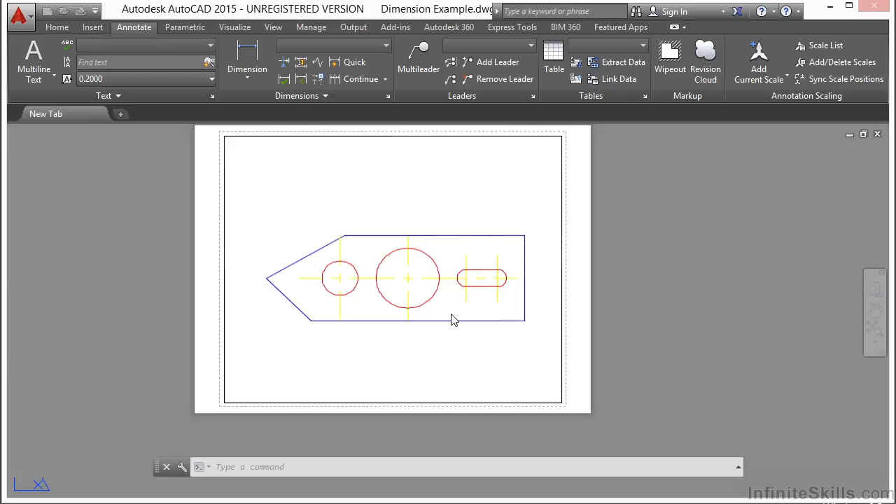Go to the Dimension tab. Here we have several different dimensions already put in. You can make changes to dimensions through the Properties panel, which you can open by pressing Control and the number 1 key at the same time.

If you want to change the text value, double-click the text, and that will open it up in a text editor. You'll have what looks like your multi-line text editor contextual ribbon, giving you access to justification, fonts, colors, bold, italics, etc. You can even match properties inside the text editor, change your text style, or type things in.

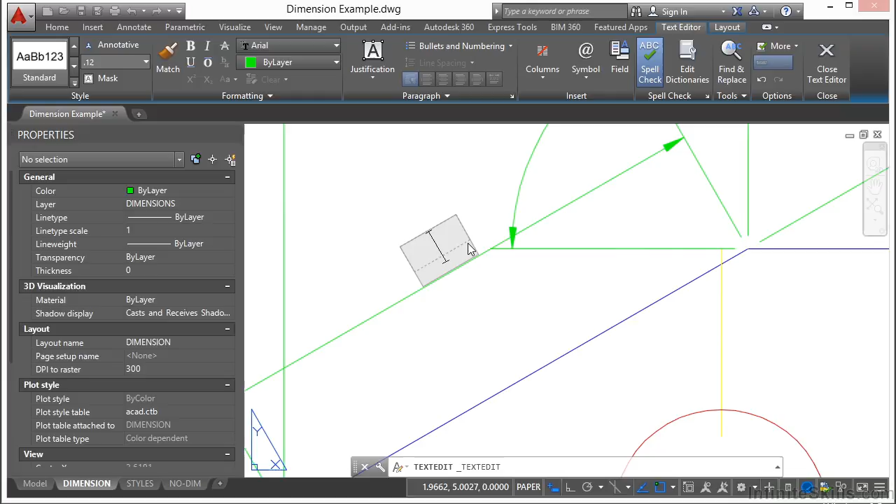Let's say we need to represent this not with the measurement, but with some actual words. Just select that text object and press delete or backspace to erase it, then type in anything else. I'm just going to type in something simple: side. If you press enter, it carriages down to another line, so click somewhere outside of that text, and there is your new text.

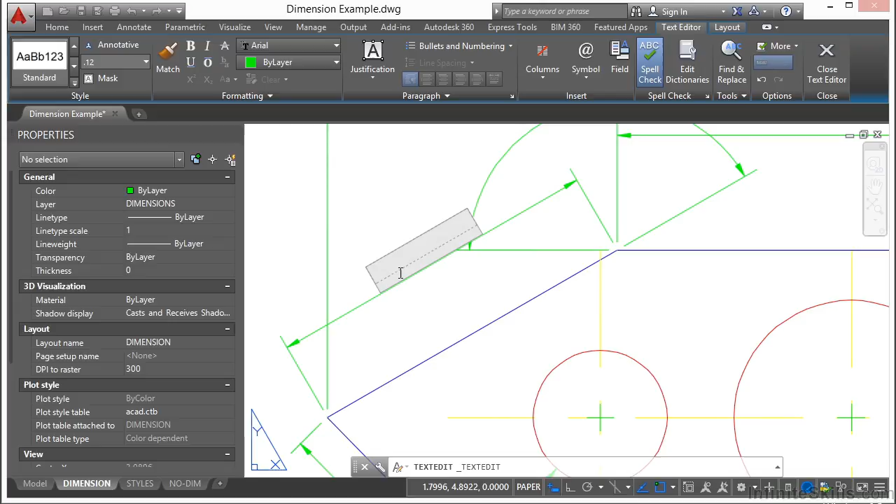You can override that quite easily. Double-click the text, and this works just like a regular text editor. You can move with your arrows, delete, and if you want your measurement value back, type in less than and then greater than, and it puts in the actual measurement for you. But you can do all sorts of things, like typing in text just like that.

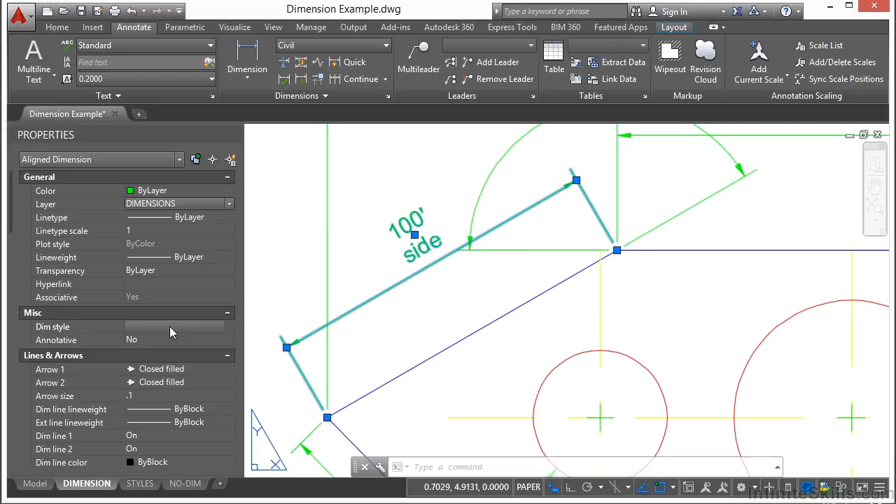If you select your text object and come to the properties palette, you can change the color here, but remember, please don't ever change it to anything else but by layer. You can change what layer it's on if you need to, change the line type, all of your regular object selection type styles, and change the different type of style.

If we scroll down, we can override some of the other features here. Typically you're not going to want to override any arrows or anything like that, except for very special cases. If you need certain or specific arrowheads, you can do that, though I'd suggest creating a style specifically for that purpose.

But you can change some of these objects here. Just click on them, find the one you want, and it will make it into a dot or an arrow. Now you have an arrow 1 and an arrow 2, just like you'll have a dimension line 1 and dimension line 2, and so on. All of the items that refer to number 1 are the very first one that you click. So when you create your dimension, wherever I click first will be arrowhead 1, extension line number 1, and my second selection will be number 2.

I'm going to delete this. So if I select my dimension again, and I want to turn off some of my dimension lines, like right here, I select it and turn it off. That'll be this left side. Now your dimension line is the line, sort of horizontal, going from extension line to extension line, where the arrowheads go. I can turn them both off if I'd like, so that I have just the text and just the extension lines. It's a rare case that you would want something like that, but you can do it.

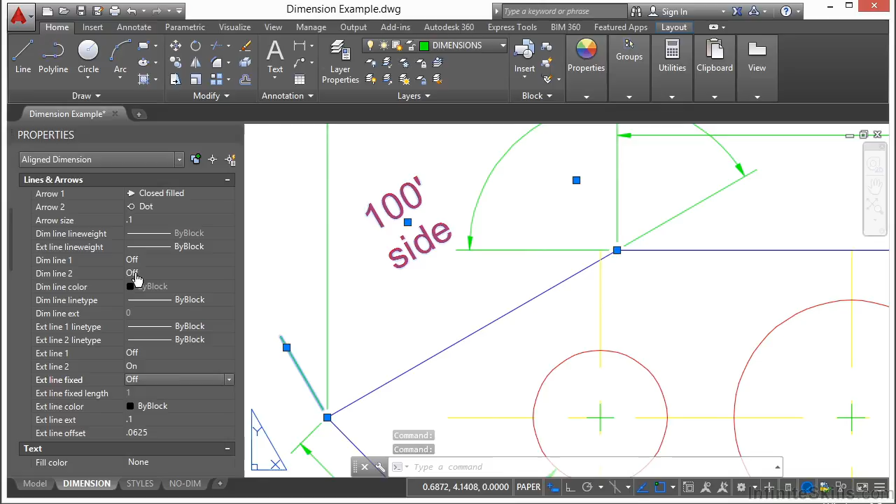Now your extension lines, you can turn off and on as well. Just select it and turn it off. And I'm going to turn my dimension lines back on. Sometimes this is something you might want to do: leave your dimension lines on, but turn off your extension lines. So you can see here, there are a lot of different things you can change.

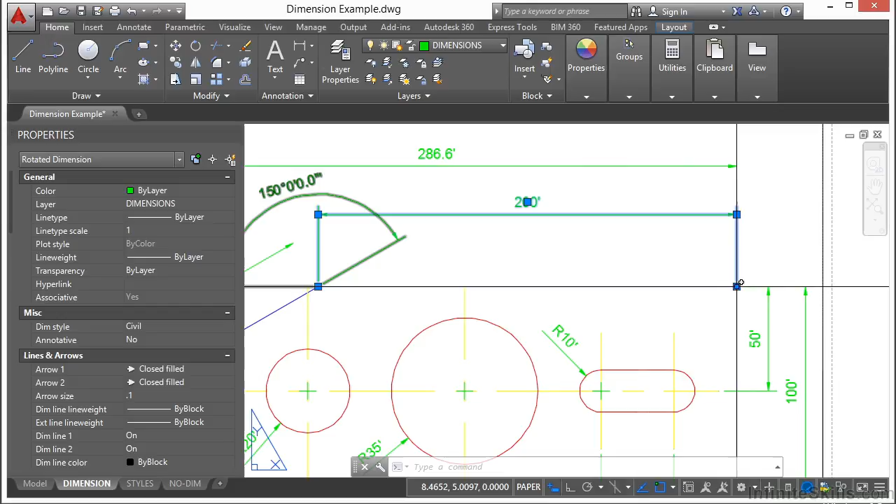You can also grip edit a dimension. If I select a dimension, you can see I have a couple of different grips here, and each one has different traits. If I select this point, this changes where the dimension is, so it's dimensioning to a different spot. Once you move it, your value will change, so you can change that at any time.

These grips here at the arrowheads will reposition it, up or down like that. And the grip on the text allows you to move it and put it in different locations.

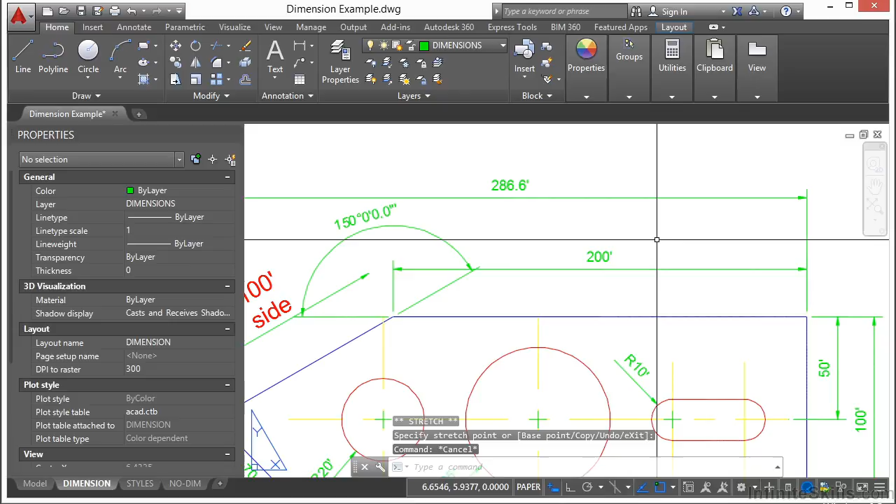Now, if you raise it up or raise it down, your extension lines and dimension lines are going to follow it with you.

So that's a great way to align these and use them the way you want to. There are a lot of other dimension tools on the ribbon. Go to the Annotate tab, and you can have a lot of different items right here, with even more at the bottom. Let's go over some of them.

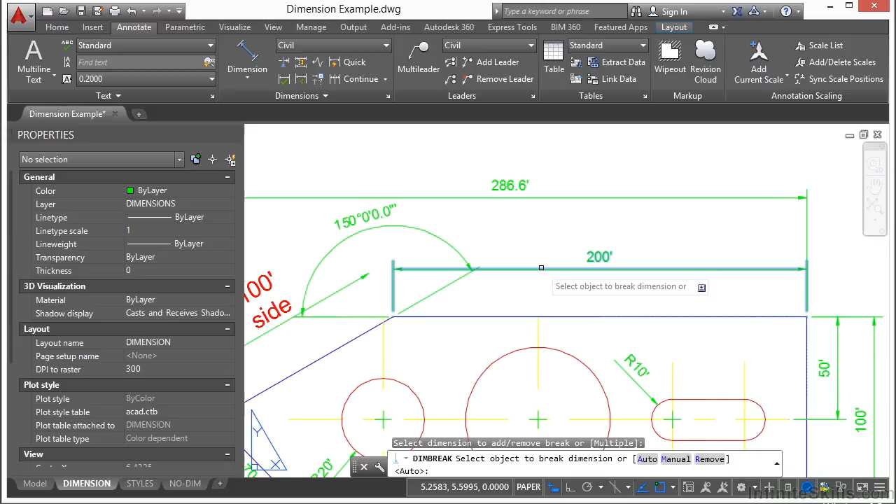This puts a break in your dimension. You select the tool here, then follow the on-screen instructions. Select the dimension you want to add a break to, then select the dimension that goes through it, and it will automatically size that for you. That's a nice little feature there.

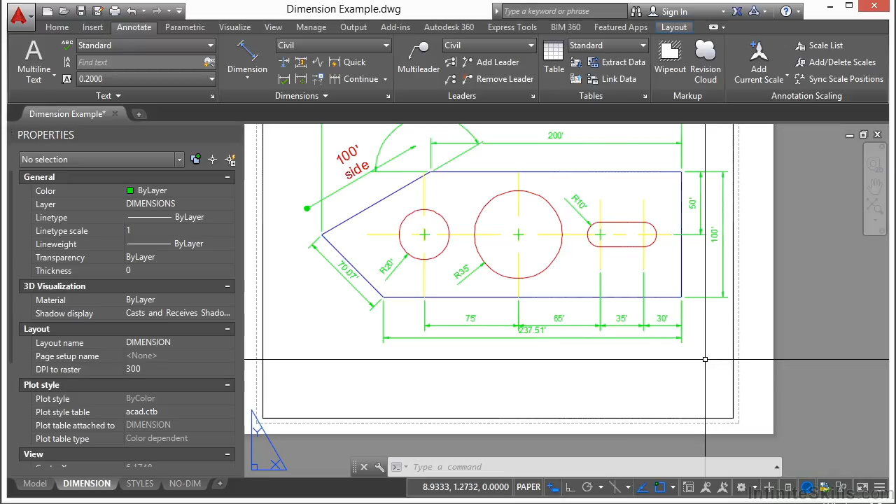Another one you might want to use is the adjust space tool. This adjusts the space between your linear dimensions. If I select the baseline and then select the one to change, right click, I can just hit auto, and it will automatically adjust it to a certain size. This is good if you want a lot of stacked dimensions that need the exact same spacing throughout the view. That'll keep your drawing looking real nice.

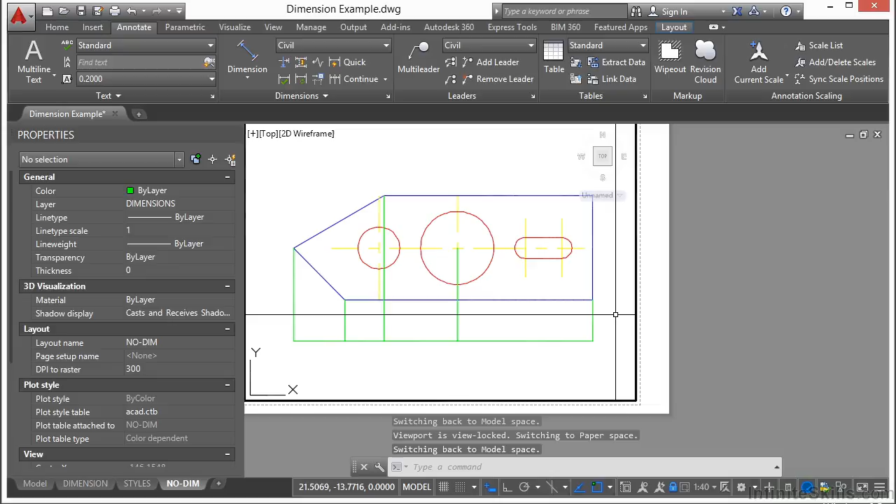This quick tool will draw dimensions very quickly, but you have to be in model space and able to select. I'm going to select several different items here, and then it does this. Of course, it's not to the proper scale—I don't have this set up correctly, but you can see it puts all of the dimensions relative to that view in there right away, real quickly. You don't have a lot of control over it, so it's not something I use a lot, but in some mechanical drawings it might help you get a string of dimensions in there very quickly.

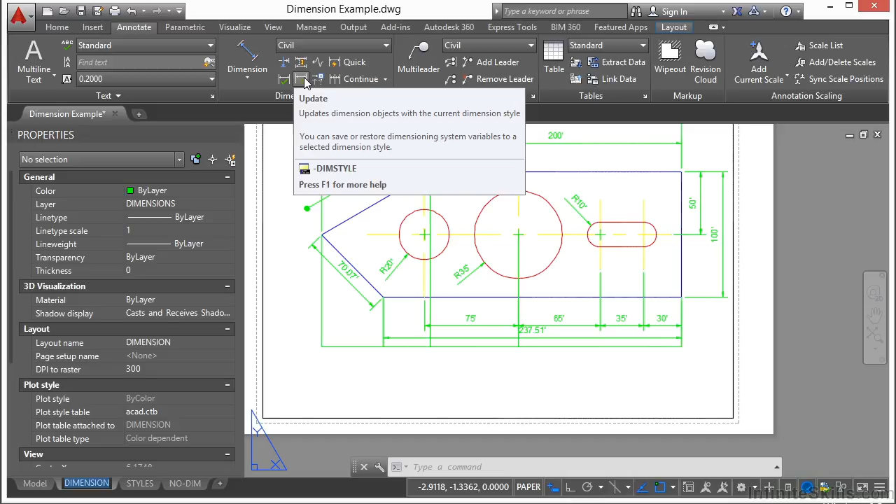This will add inspection symbols to your dimension. This will update your dimensions to a current style. Sometimes the dimensions don't update right away if you've changed the style. If you click this tool, then select the dimension object you want to update, then press enter, it will recalibrate that dimension to look like the style it's assigned to. That's a quick way to fix your dimensions if they get messed up.

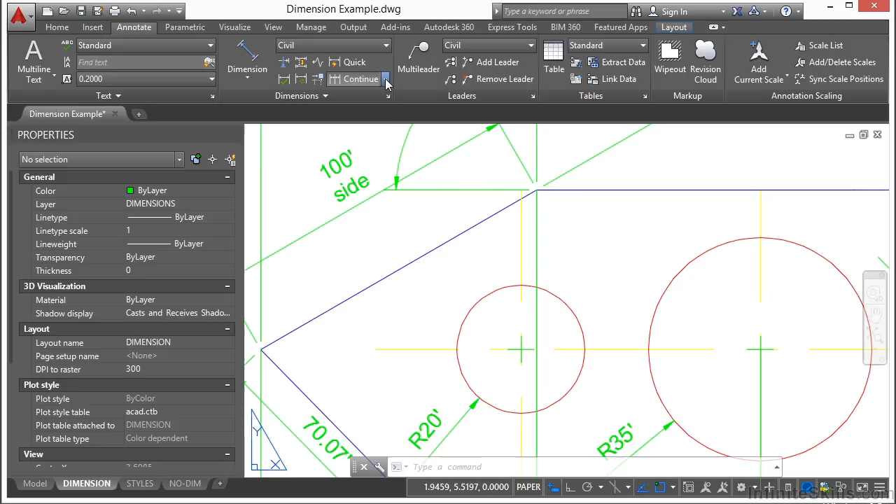This will reassociate dimensions that come off of the wrong points. This is the continue option—I use it often. You have two different types of continues. So if I go to this dimension style here, I'm going to erase these so they're out of our way.

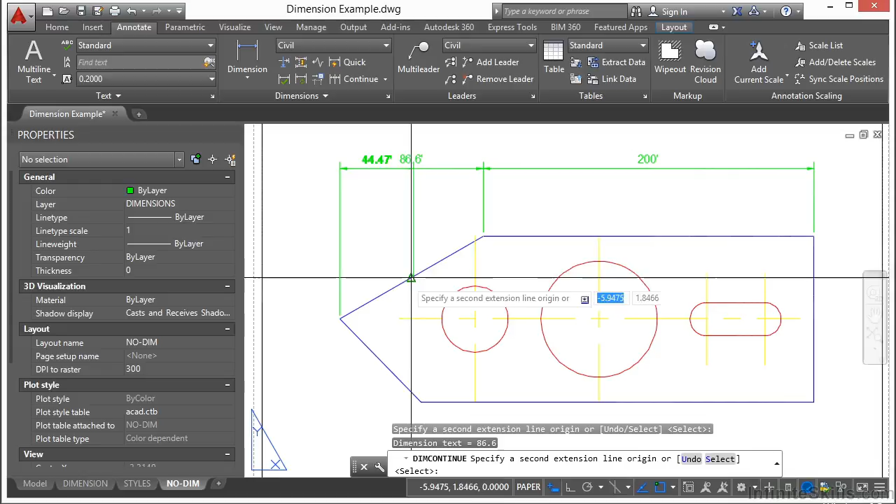But if I start a dimension here and click on continue, it's going to pick up right where I left off, so I can continue dimensioning. As you see here, it goes on and on. Now you can do the linear, or you can do stacked and baseline, and it remembers the last one you used. However, if you don't want to use that one, once you start the command, type in the letter S, press enter, and then select the baseline you want to start with. And there you go—they both work the same way.

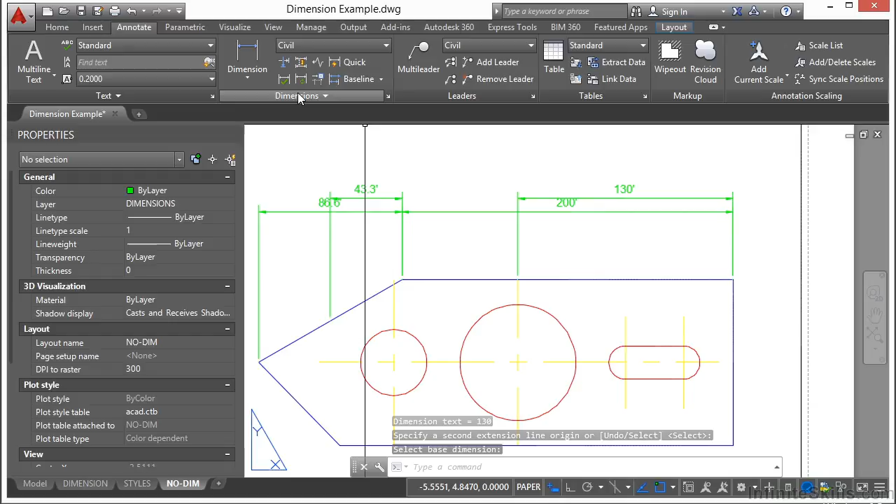Now there are a few other things in here I really want to show you—the jog line. So let's say you want to create a dimension and show a jog in it. Maybe it's an estimated dimension that you're showing off, like an extension. Sometimes we need to put a little jog in our dimension line.

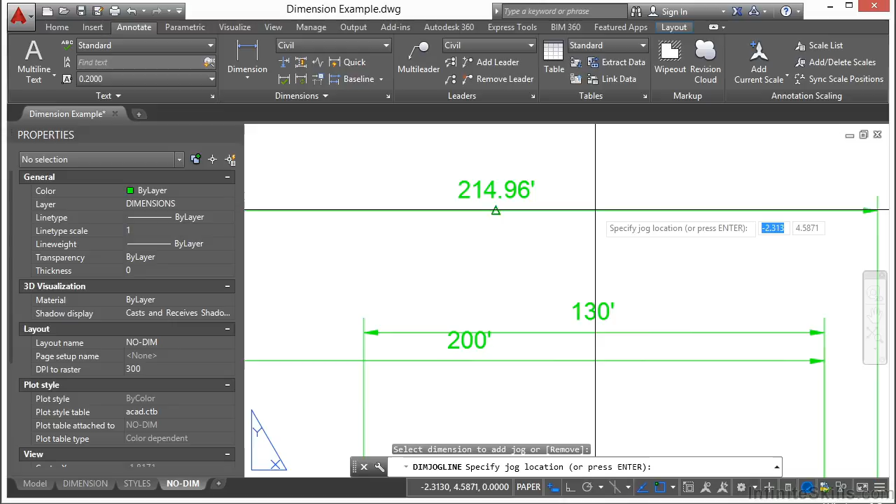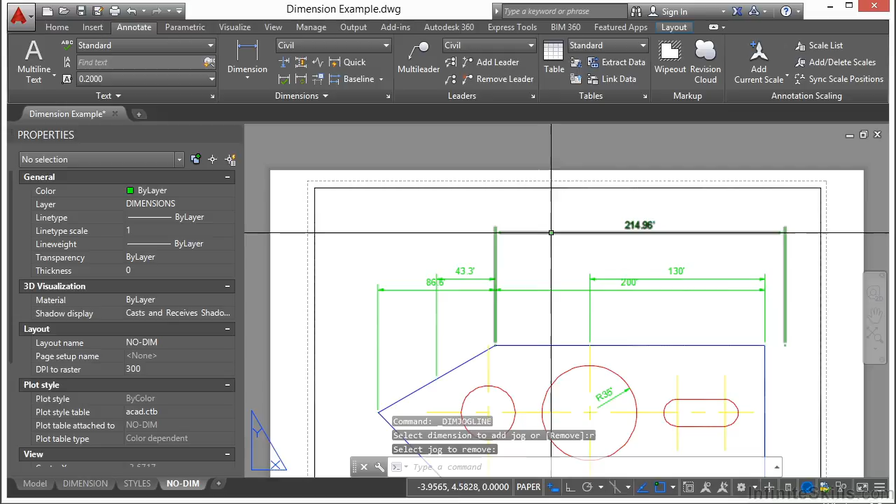You take your dimension, start the dimension jog button, just click on it, select your dimension, and press return. That will put your jog right in there, and then you can click on it and drag it left or right, wherever you want it to go. Now if you want to remove a jog, start the command again, type in R for remove, press return, select the dimension, and it goes away. That's a nice little thing you can do.

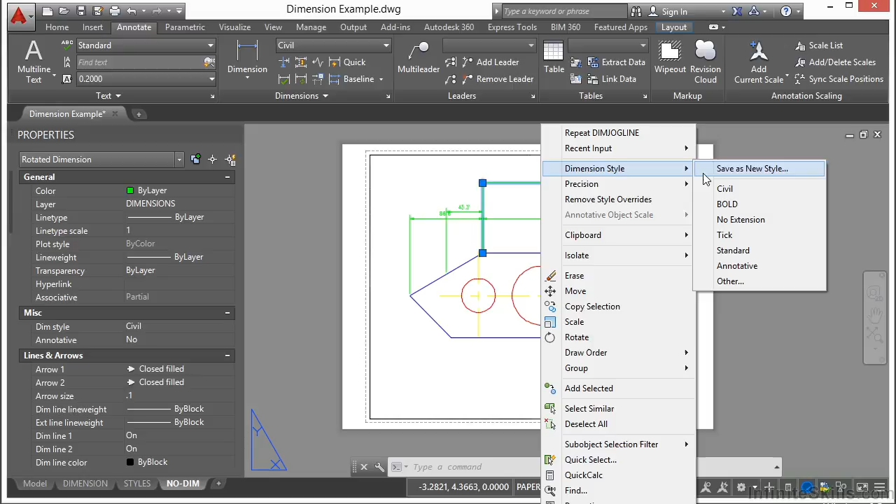Also, if you select a dimension and have your right-click shortcut menus on, you can get to different things here like dimension style. You can change the dimension style, or if you've changed the dimension settings some way and want that to be a brand new style, you can click here to save it as a new style. You can remove style overrides. You can change the precision of your dimension so it can go to more or less decimal places. So there are a few things you can get to with a select and right click.